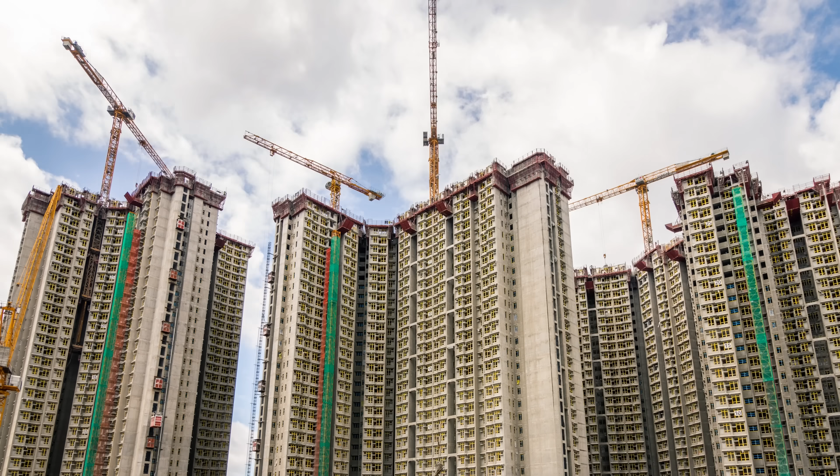Have you ever wondered who processed the water so it is clean to drink? Who designed an efficient transport system to facilitate your journey daily? Who built all these safe structures for our living? It's all by civil engineers.

We are civil engineers who embrace emerging technologies such as artificial intelligence to build a smarter and more sustainable built environment that is more adaptive to the negative impact of future climate change.

Hello, I'm Anthony, Associate Professor and UG Coordinator of the Department of Civil and Environmental Engineering at HKUST. In this talk, I'll introduce what civil engineering is, some examples of exciting civil engineering works in Hong Kong, and our programs at HKUST.

So, what is civil engineering? It is an engineering discipline that deals with the built environment, which encompasses much of what defines modern civilization we see nowadays. Civil engineers are the professionals who built safe structures such as buildings, bridges, roads, tunnels, and many other types of infrastructure. In short, we engineer a civilized environment for mankind.

Different from architects who mainly involve in the pre-construction phase of infrastructure, civil engineers apply science and mathematics to design the infrastructure and oversee the entire design to completion process. We make sure the design is structurally feasible and optimal, and we make the design into reality.

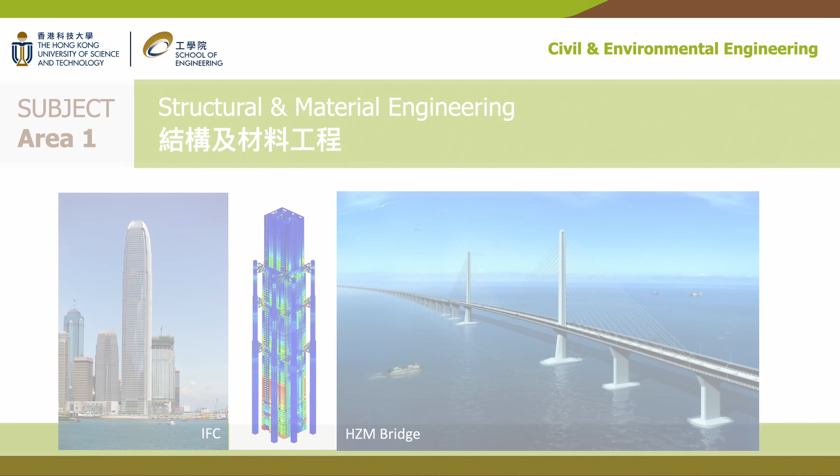We need to carefully consider wind load and conduct simulations to assess the structural performance of the buildings. Another discipline is geotechnical engineering. Geotechnical engineers deal with soil and rock and their influences on the safety of buried infrastructure, such as piles and tunnels. For mountainous regions like Hong Kong, these engineers play a crucial role in assessing landslide risk under rainfall and designing effective systems such as barriers and retaining walls to reduce the damage to the cities.

Environmental engineering covers aspects related to quality improvement for water and land, monitoring and modeling of air pollution and environmental threats associated with our ever-changing climate. Environmental engineers develop low-carbon and sustainable solutions for improving and protecting our natural environment.

Water resource engineering is crucial to coastal cities like Hong Kong. If you still remember, in 2023, we had several very strong tropical cyclones, Saola and Haikui. The storm events had seriously flooded Macau, but not Hong Kong. It is the achievement of our civil engineers who had constructed effective urban drainage systems and catchment of rainwater to prevent the city from damage and property loss due to flooding.

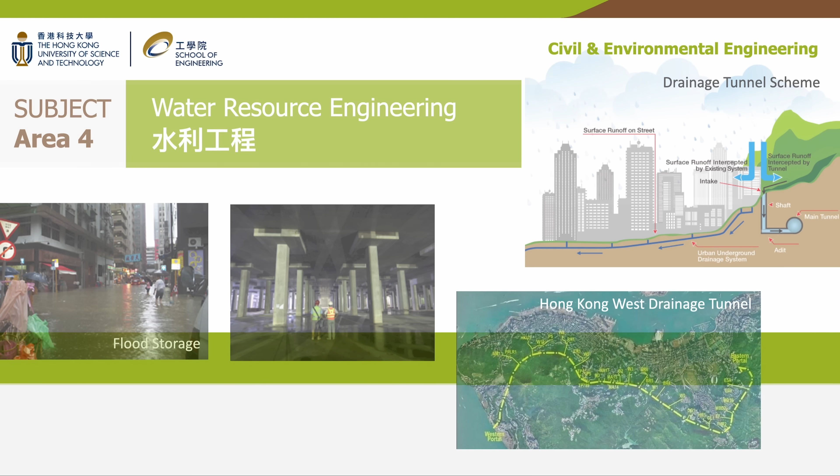Civil engineers also design transportation networks and systems. We do not build high-speed trains nor the cars, but plan and manage transport infrastructure that these vehicles travel on. For example, how can we direct the traffic from one tunnel to another in the most efficient and fair way? This is an example of the problems that we try to solve.

For big projects like airport and major bridges, we have hundreds or thousands of people working on construction sites. They have different names, skill sets, and tasks. Systems engineering studies the management of these manpower, finance, resources, etc. in infrastructural projects. Advanced digital technologies like building information modeling and sensing technologies are adopted to aid civil engineers' design and planning.

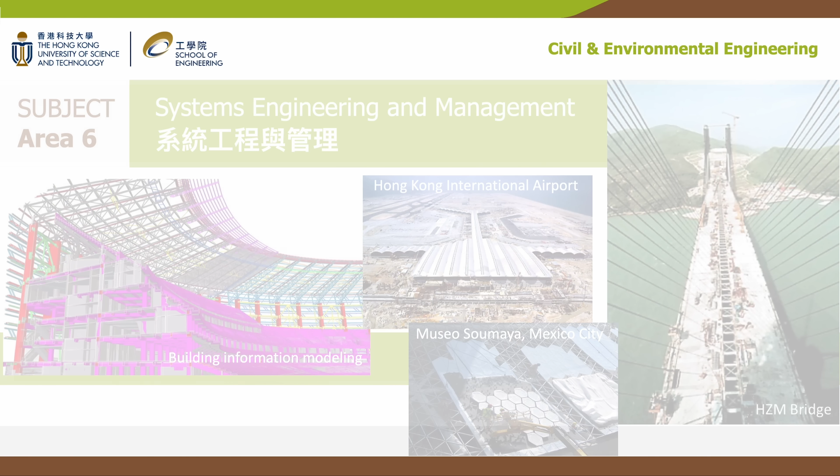Nowadays, we often hear a term called smart cities. A city cannot have no buildings, no roads. Civil engineering is fundamental to developing a smart city. We are now living in a digital era. Civil engineers develop and adopt cutting-edge digital technologies and artificial intelligence in construction.

Making our buildings and bridges smarter and also making our environments greener, more resilient, comfortable, and livable.

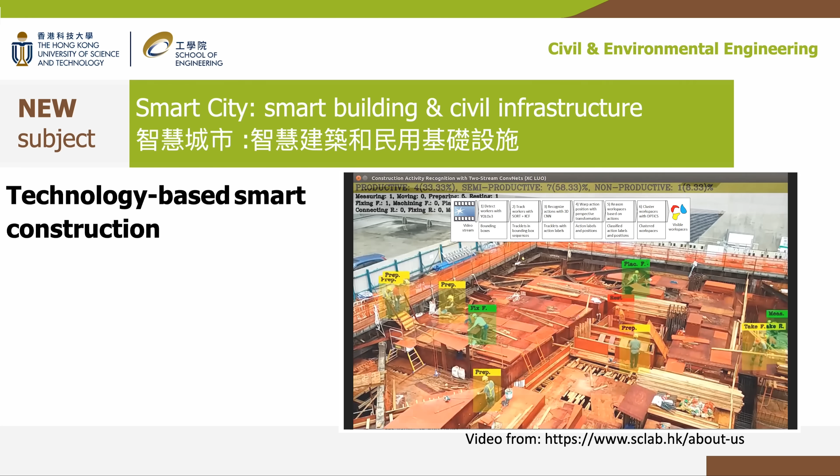One example of smart civil engineering is technology-based smart construction. Every job site serves as a data source for AI, generating insights from mobile images, drone videos, and security sensors. This enables analysis through AI and machine learning, allowing managers to monitor worker activities by analyzing site video, enhancing safety and decision-making.

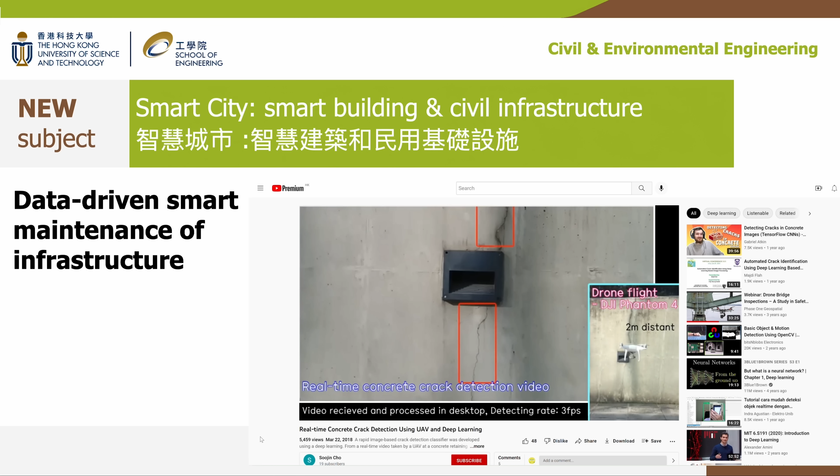Here is another example of smart civil engineering. We utilize innovative technologies such as drones, artificial intelligence, and robotics to transform infrastructure maintenance through data-driven automation, including real-time concrete crack detection.

The globe is facing grand challenges in terms of sustainability. Civil engineering plays an important role in the 17 Sustainable Development Goals set by the United Nations, including clean water and sanitation, clean energy, innovation and infrastructure, sustainable cities, and climate action. Civil engineers seek and provide solutions to mitigate natural hazards under the negative impact of climate change.

With emerging technologies in recent decades, can we make better predictions of our climate? Can we develop smarter hazard warning systems? Can we make engineering design more automated? And can we enhance the efficiency of construction? Yes, artificial intelligence is an excellent tool to make civil engineering design much smarter and sustainable.

In August 2023, under the leadership of the Department of Civil and Environmental Engineering, HKUST launched the first satellite for advancing our capabilities in environmental research related to climate change.

With the launch of the HKUST TFY-BB1 satellite, we are able to collect an enormous amount of climate data. Together with the use of machine learning and AI technologies, we can now make better forecasting of typhoons, providing necessary data to civil engineers to devise accurate mitigation plans to prevent damages from natural hazards.

In addition to improving our ability to make more accurate climate predictions, the satellite is extremely useful for geotechnical engineers to make informed decisions on slope management at regional scale. Our department has been working closely with related departments of the Hong Kong government to transfer the new technologies to real-life application. Another application of AI in civil engineering is the creation of integrated human-robot AI collaboration relationships, aiming

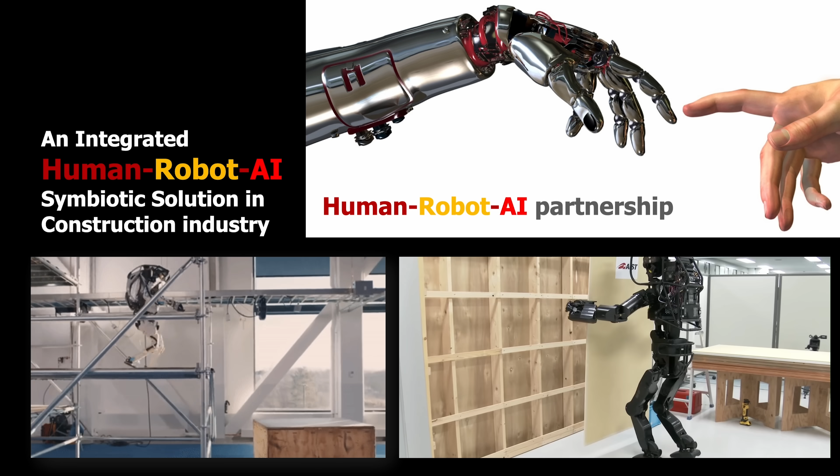to make the construction industry more efficient and safe. The robot can be trained to operate repetitive site activities.

After knowing some general background of civil and environmental engineering, let's take a look at what exciting civil engineering development we have in Hong Kong and our neighboring regions. This is a future map on how Hong Kong will look in 2030 and beyond.

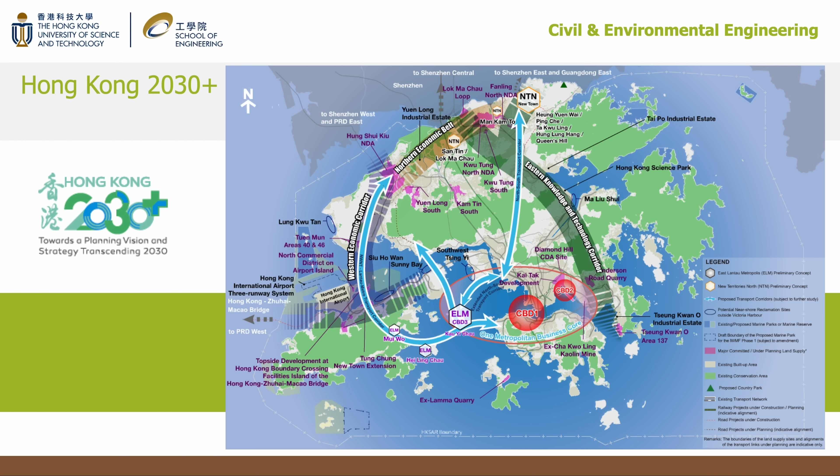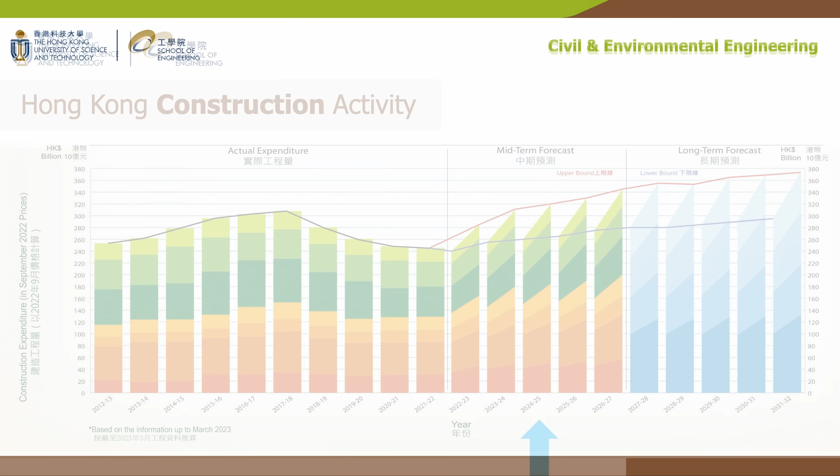There are many exciting ongoing projects such as Kai Tak area. New urban developments like Lok Ma Chau and Hung Shui Kiu areas are still far from completion. We have a lot more interesting projects to work on in the future.

How many of you have been to the Hong Kong-Zhuhai-Macau Bridge? It is one of the biggest projects for Hong Kong, greatly reducing travel time between Hong Kong, Macau, and Zhuhai. With our solid civil engineering work, the bridge has survived the historical typhoon Mangkhut in 2018. If you have a chance to pay a visit, I'm sure you will be amazed by what civil engineers have built.

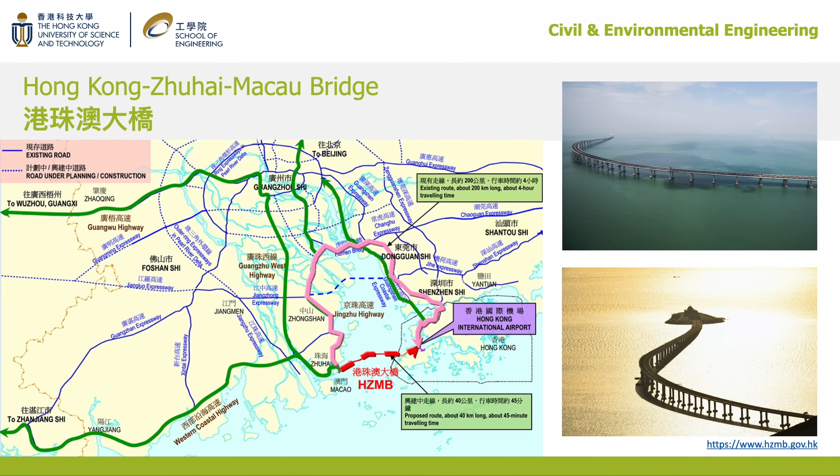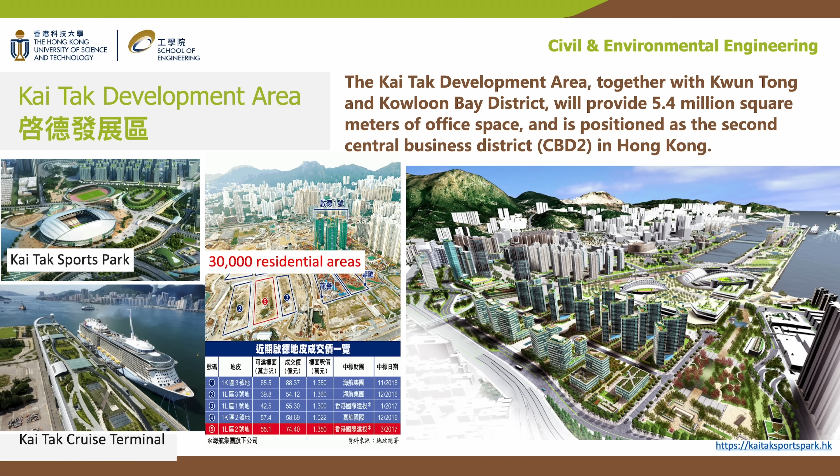The Kai Tak development area, where our old airport was situated, together with the Kwun Tong and Kowloon Bay districts, will provide 5.4 million square meters of office space and is positioned as the second central business district in Hong Kong. It will also provide many residential flats. This development plan means there will be a lot of buildings to be designed and constructed for the project in recent years.

Some quick information about rankings: this year, HKUST is ranked 47th in the world, and our Civil and Environmental Engineering program is ranked top 27 globally.

So our civil engineering programs at HKUST, both teaching and research, is world-leading. Now let's talk about what our Civil and Environmental Engineering program at HKUST will offer to prepare our students to have a solid foundation in the many disciplines of civil engineering.

We have two programs, Civil Engineering and Civil and Environmental Engineering. Both programs have met the requirements of the 4 divisions of the Hong Kong Institution of Engineers, which are Civil, Structural, Geotechnical, and Logistics and Transportation Engineering. This means our graduates are eligible to take part in the so-called Scheme A training leading to a chartership and becoming a professional civil engineer. This provides a faster pathway than those who study civil engineering programs from some overseas countries.

Both CIVL and CIEV programs are designed for a 4-year study. The first year will cover general engineering knowledge, and students will learn some fundamentals of civil engineering since the second year. The third year will start to cover some special courses in different disciplines. The program covers totally 120 credits for graduation.

What is special and attractive about our program is that we require students to gain hands-on experiences by applying what has been learned from the classroom. This includes industrial training, internship, final year project, and capstone design projects. These trainings will make our students more marketable for future job hunting.

This is the professional path how our graduates would become chartered engineer after graduation. If you are admitted to our program at HKUST next year in 2025, you will graduate in 2029 and can start the 4-year HKIE Scheme A training. After 4 years, you can be a professional engineer chartered under HKIE. Afterwards, you can be further promoted to senior engineer, chief engineer, or even partner and director of different engineering firms.

Most of our graduates will join the consultant, contractor, and client sectors, which represent 3 major different roles in civil engineering industry. This salary figure is only for reference. There are fluctuations in the salary range, but overall it is attractive, and we are one of the engineering programs whose graduates earn the highest salary. Not surprising, because of the boosting industry and increasing demand of workforce.

Civil engineering is a global profession. Our alumni have been involved in various exciting projects. For example, Kelvin Chan, who is a graduate in 2016 and currently a resident engineer working for a consultant company, has participated in multiple mega projects, including the design and construction of Tseung Kwan O, Lam Tin Tunnel, Cross Bay Link, and Yuen Long South Development.